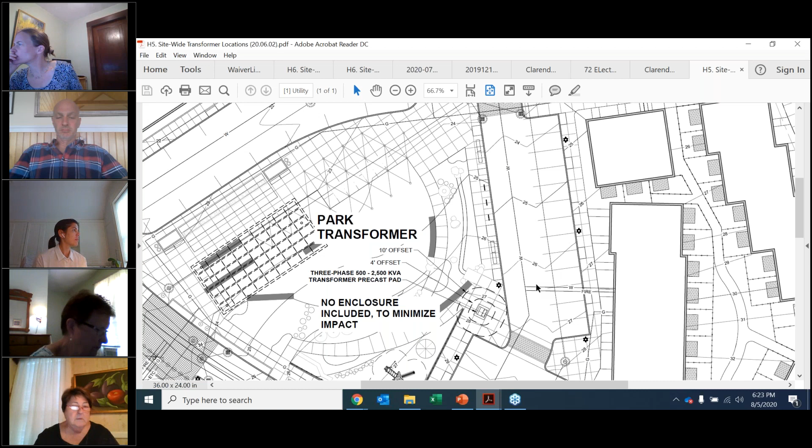Chair Fontano, this is Corey Meehan from the development team. Hi Corey, how are you? Good. Can you help us a little bit? I was hoping I could just give a little input here. It's not our intention to ask the zoning board to go against the wishes of the staff. It is our hope to be able to work with the staff to get them to the place where they make a recommendation that our screening is effective and meets the needs of this site. I think Charlotte wanted to see if the zoning board had any additional thoughts, but we should continue to work with PSOF between now and the next meeting to hopefully withdraw that denial recommendation.

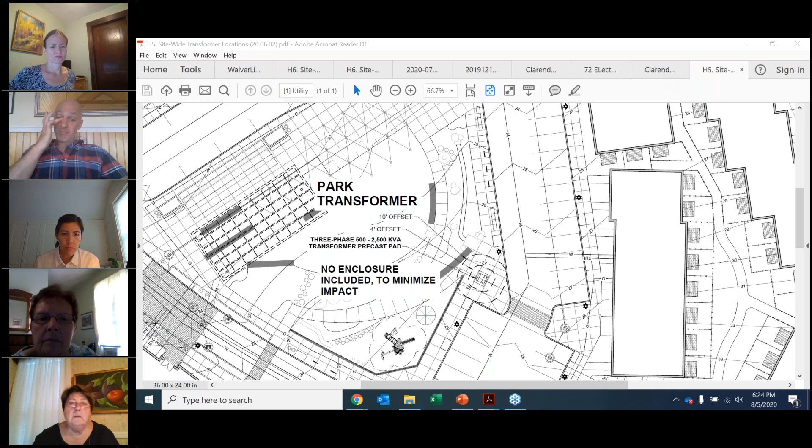All right, I get it. That is correct. Madam Chair, Charlotte speaking, I have pulled up on the screen the H5 site-wide transformer locations from early June. Again, as Corey has mentioned, the applicant team is continuing to work with PSOF to hopefully revise some of these, but this transformer shown on the screen is, I think, the one of most concern were it not to be screened in some way, since it is in such a central location.

Where are you, is that your cursor going around? Can you point out where you think it is? It looks like it's on park area, hardscape, right? Park, yeah. All right, thank you, Corey.

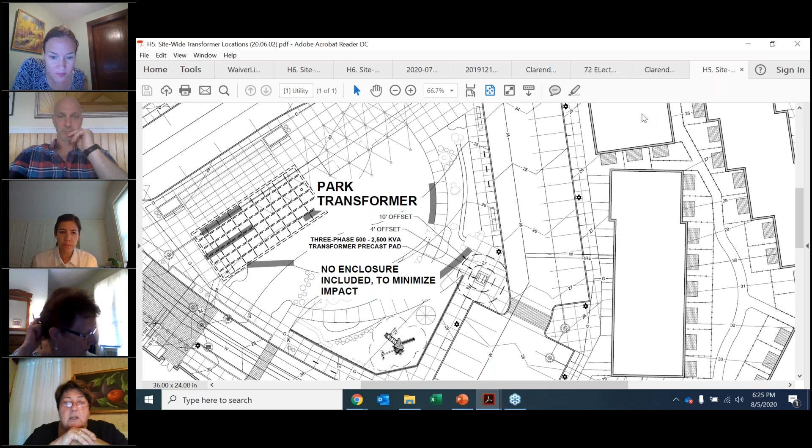No, like I said, as long as you guys keep working with Mrs. Oliveria - and you've worked so hard to make this such a lovely place, I just want to reaffirm that sometimes you'll look at a building after we approve it and the wires are all out front, the meters are all out front, it doesn't look good, and you're wondering why they didn't put a little bush or something in front of it. I understand you have access, so I'm sorry for holding you guys up, but I just wanted to get that straightened out. Ian and Elaine, are you all set?

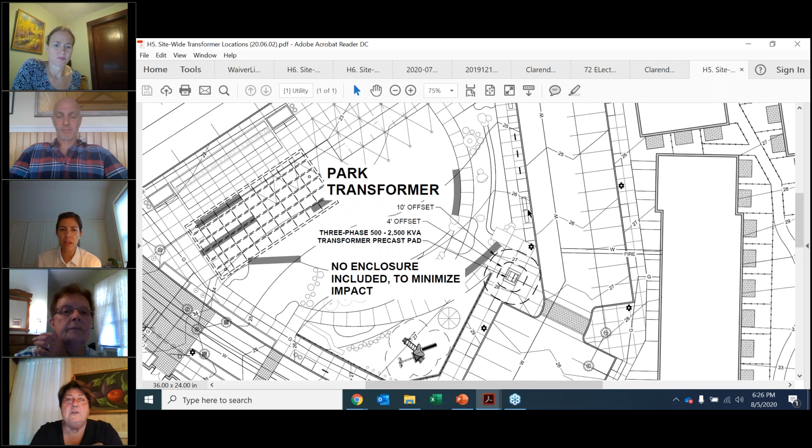I don't feel good about it, I guess I still don't know. That picture didn't really help me at all. I don't know where it is or how big it is. We need to see what's proposed — it's not by 4, it's by 2. But they're not proposing to do nothing. They say they may not comply, but they're going to do something clever or creative to mitigate, so we need to see what that is.

All right, so that's what we're saying, Elaine. They're gonna still work with Mrs. Oliveria's staff, okay, and see what they can come up with. I just went, and it's a small one — it's 2 by 2 by 4, I think, that Andrew said.

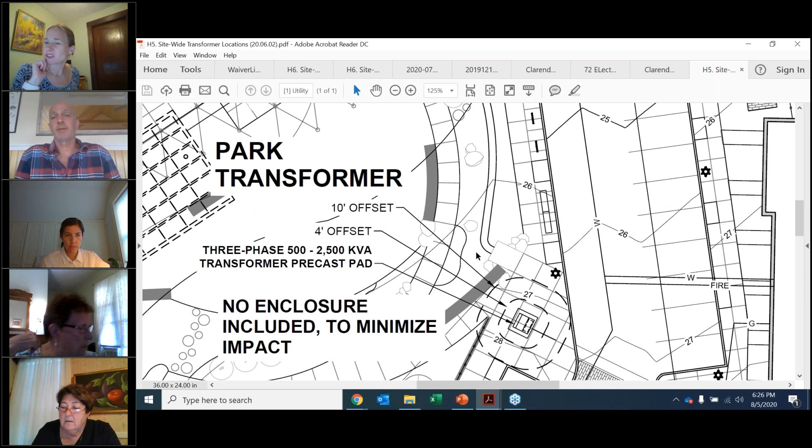We'll keep an eyeball on that, we'll ask about that afterwards. Madam Chair — yes, ma'am — there's another transformer that's between the townhome buildings, which is also in a very prominent location, that also is saying it's not proposed to be screened. We'll follow up with you guys generally and say, how did you make out with the transformers that were in jeopardy? And it looks like it's right in a pedestrian path, so I'm just not even sure how that works.

This is Danielle speaking. Yes, okay, Danielle, thank you. I see the townhomes transformer. Madam Chair, there is an updated drawing on this that has been submitted to PSOF, I think only shortly before this meeting, but we will have that for next time. All right, thank you so much.

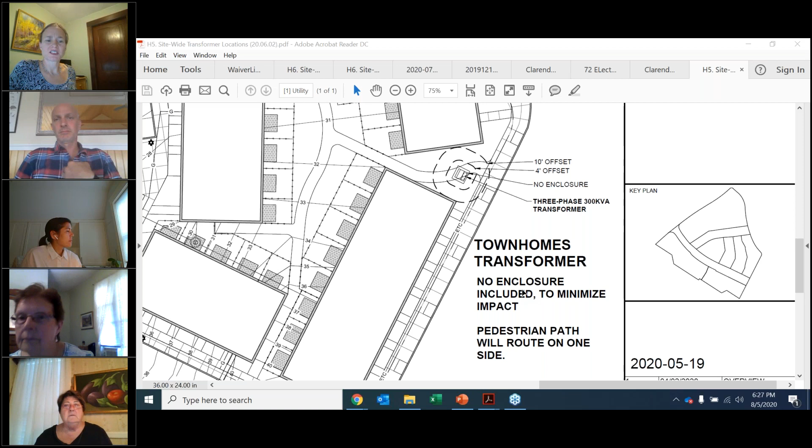If we're supposed to vote at the next meeting, can we get a completely updated plan set? Because I don't even know what is accurate at this point and what the record set is going to be.

Madam Chair, through the chair, this is Charlotte speaking. Hi, Charlotte. We are working on getting a fully updated packet — for example, getting the waivers list updated to be fully accurate to the current plans, having updated mobility management plans, which have changed slightly. And I will work with the applicant to have one packet with everything properly dated to provide to the board.

And if we're not ready for the next meeting, we're not ready, you know what I'm saying. You don't have the stuff that we need or whatever they're looking at. We get it, I know you're busy and I know there's going to be a lot of conditions you're all working on, so we do the best we can with what we have.

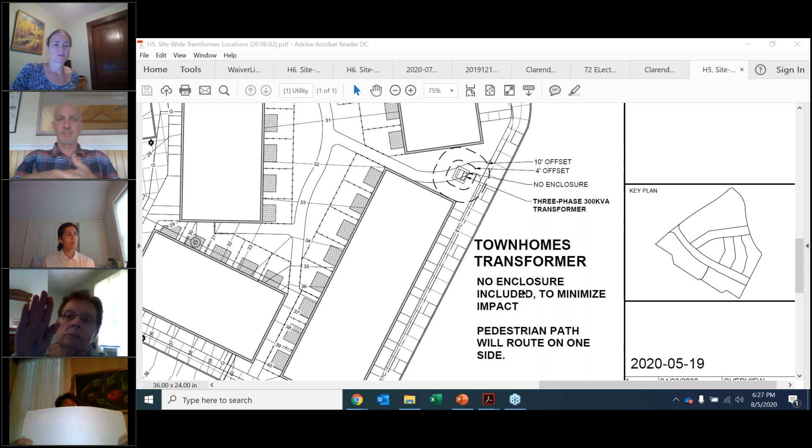Thank you, Danielle. Elaine, hard copies if it's going to be all new plan set — I like hard copies. Okay, Elaine, you got that, Charlotte? That is understood.

Okay, so that was waiver 21. We're going to jump down — the next waiver is 22, and I just wanted to clarify for the record, I believe it has been stated, but the PSOF has expressed concern about the lack of, or the potential lack of, curbing protecting the rain garden on lot D1 from the woonerf raised crossing area on thoroughfare 1.

This waiver — the staff's current plan, and Corey, please jump in if this does not align with your understanding — but the applicant has indicated that they're willing to do curbing with gaps, which would allow both free flow of water from the road into the rain garden and would allow the free flow of pedestrians across the woonerf and through the central civic space. While it would not comply fully with this requirement, it would step towards compliance, since this requires that landscaping is raised or has full curbing. It would not be full curbing, it would be curbing with gaps.

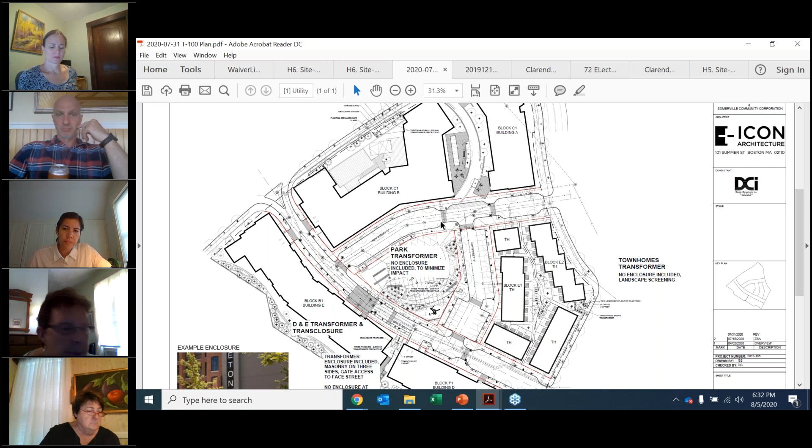This is the transformer plan, but if you can see my mouse from this area down here up to here, this is also a waiver request that PSUF does not feel they yet have enough information on to feel comfortable with, and that staff and the applicant are continuing to work on. I wanted to highlight it because it is a new waiver request from the last meeting.

I think staff's hope is, even if this waiver request remains, to come closer into compliance, potentially through the use of permeable pavers, which our zoning code does count as permeable area. So those are those waiver requests. I will share updates on waiver number 21 and waiver number 35 at the next meeting if I have them, since those are still being discussed.

I have a question on 35, that's okay. Ann Brockelman: How does that impact the green score? Can you look at that and let us know, Charlotte?

If I may just, Charlotte, could I jump in for a second? Yes, please, Corey. This is Corey again from the development team. I think it's important just to point out that the plan has not changed. This is the same plan that you saw before, and it's the same green score.

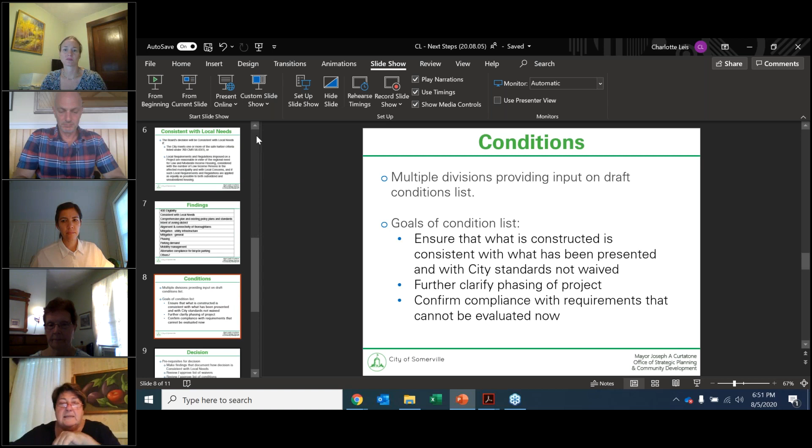Can I have a thumbs up from everybody if we're going to let Charlotte go forward with that? Yes, yes, yes, yes, thank you. All right, beautiful. All right, Charlotte, that's your findings. Perfect. Those are the findings. The board will need to vote on these findings once a decision is ready. I just wanted to do an initial review to make sure I wasn't missing anything major.

So the next section of this meeting, I just briefly wanted to talk about the goals of conditions, and the different goals that each condition is trying to achieve.

So planning staff is working with a number of other departments. We're working with PSUF, engineering, mobility, and legal to come up with the list of conditions. If this project was not a 40B, it would essentially be a master plan and 9 site plan approvals, so it's going to be a lengthy set of conditions to achieve all the different goals that conditions are meant to achieve. I've listed on the bottom of the slide some of the goals of a condition.

I'm going to go over some conditions that are currently proposed. I do not have a list for the board to review because it is still being hammered out, but there are at least some highlights.

One of the goals of the conditions list is to ensure that what is constructed is consistent with what has been presented. So two of the conditions related to that: there will be a condition that the staircase from the plaza on lot 8, or on building AB, going down to Alewife Brook Parkway will have an all-season elevator that is integrated with the architecture of the building. That was brought up at a previous meeting and is a condition that will be imposed.